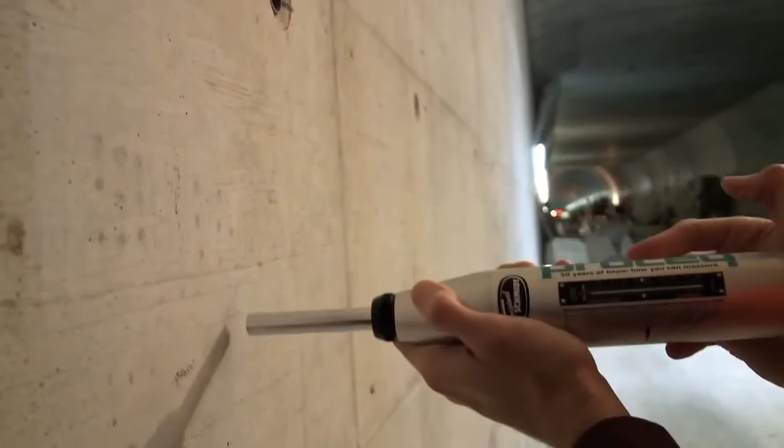The concrete test hammer, invented by Ernst Schmidt and introduced by Proceq at the beginning of the 1950s, remains to this day the most widely used non-destructive test instrument for a rapid assessment of the condition of a concrete structure. One of the most important parameters required by engineers is the compressive strength of the concrete.

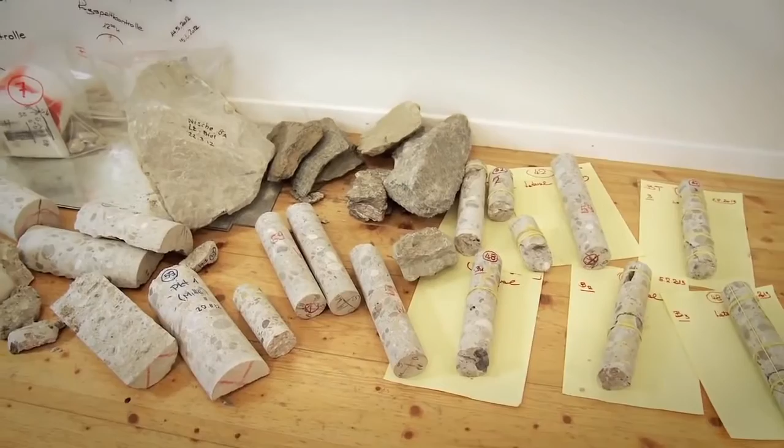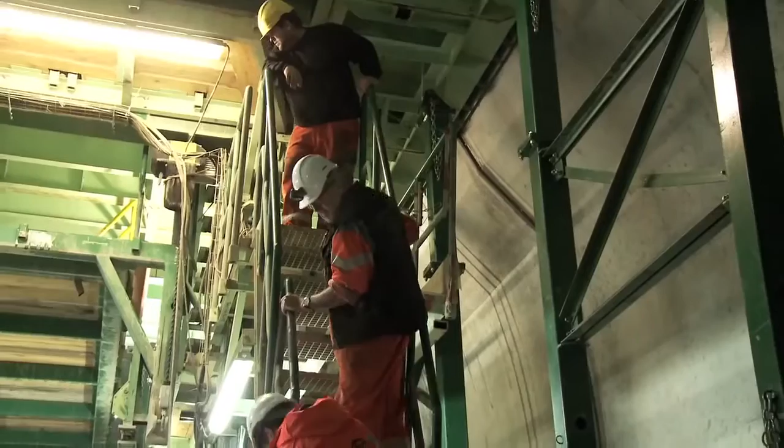The permission to take cores from existing structures is often severely restricted or even forbidden. In such situations, the rebound hammer is the only viable alternative to estimate the compressive strength of the concrete. There are many other application areas where access restrictions or the need for speed mean there is no practical alternative to the rebound hammer.

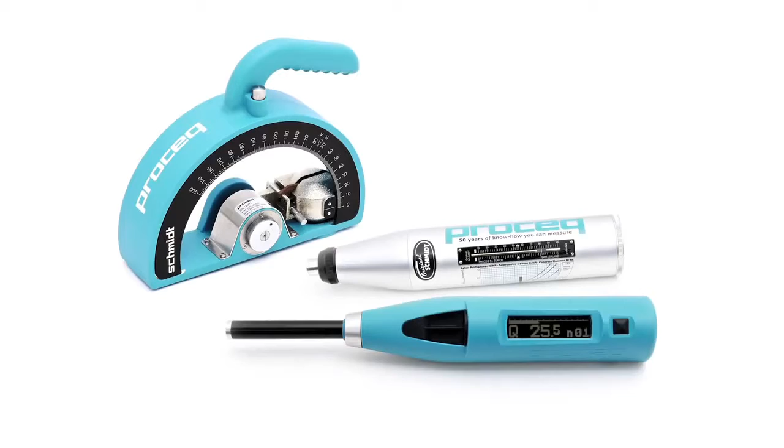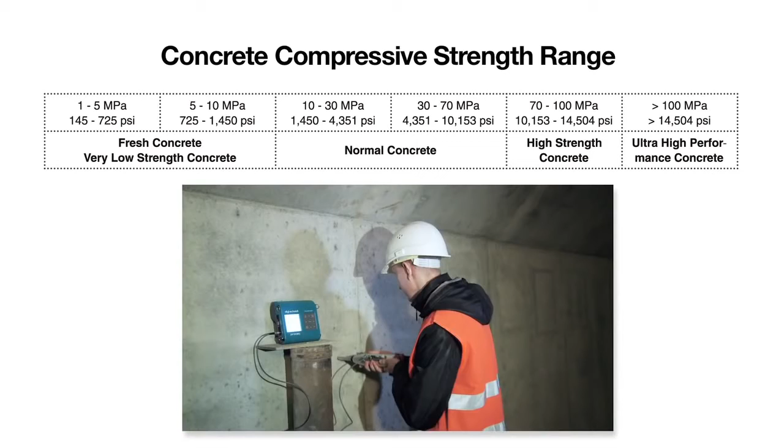Proceq's Schmidt family of concrete test hammers is the most comprehensive portfolio available. It covers the entire range of compressive strength classes from 1 megapascal, 145 psi, to over 100 megapascals, over 14,504 psi. Each rebound hammer is designed to meet the specific needs of the customer, with both standard impact energy and also low impact energy versions for thin structural elements and brittle objects.

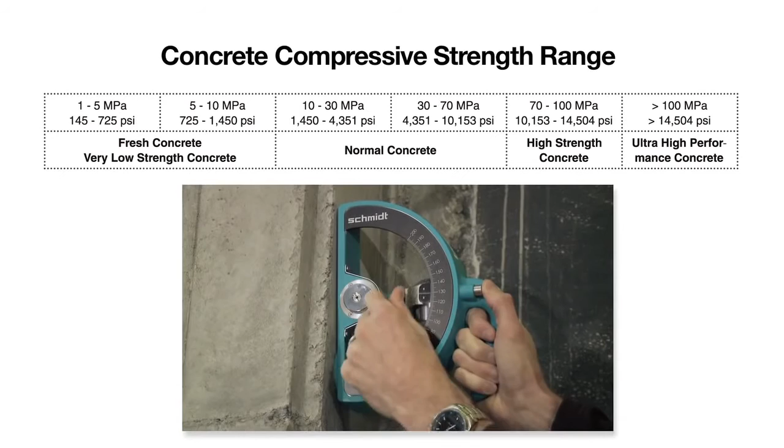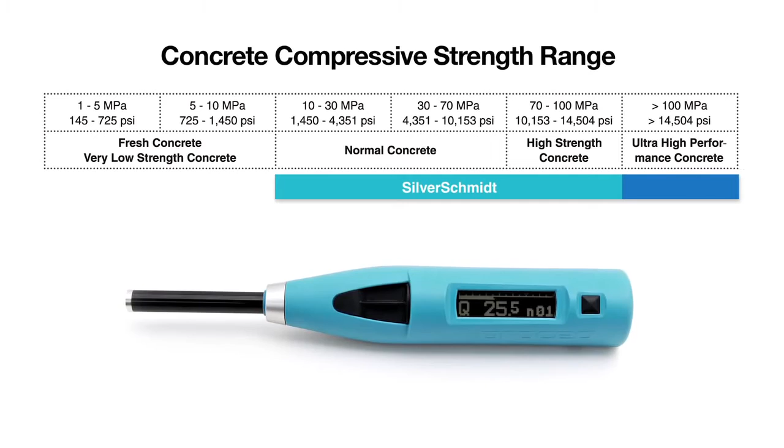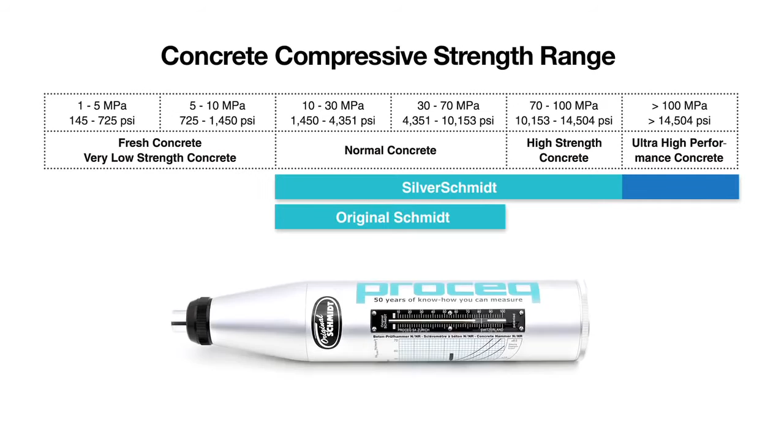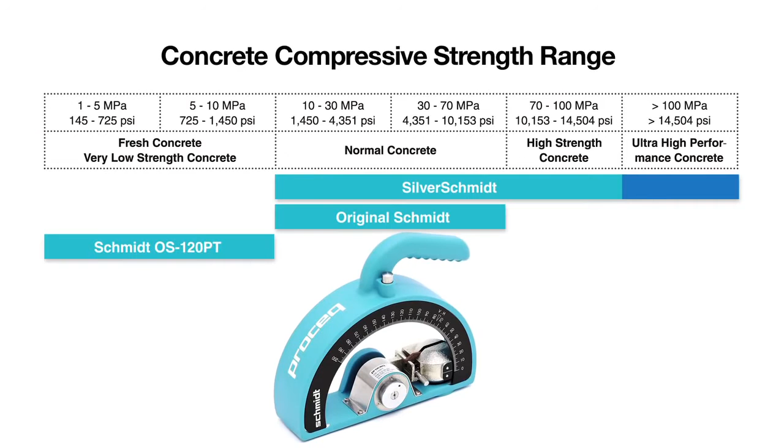With the fully integrated digital SilverSchmidt, Proceq offers the most advanced rebound hammer available in the market. The Original Schmidt is the basis of every international rebound hammer standard and remains the benchmark against which all rebound hammers are compared. The Schmidt OS 120 is especially designed to test on softer material such as lightweight concrete, gypsum boards, fresh concrete, and the mortar joints in brickwork.

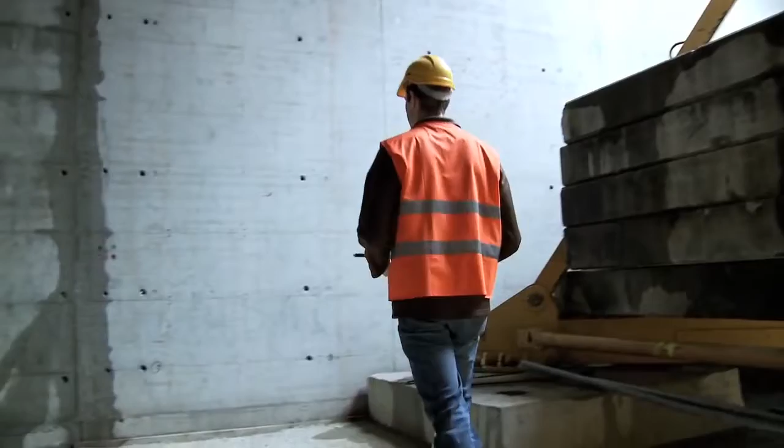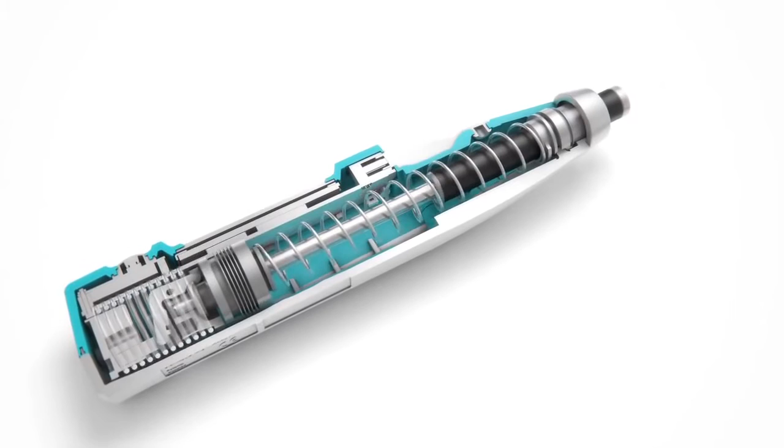The SilverSchmidt features superior performance, unmatched repeatability, and intuitive operation, all in a rugged and ergonomic unit. Independent validation testing has shown that the SilverSchmidt's patented optical detection technology for the rebound value Q has less dispersion than the classical hammers over the entire range. Another unique feature of the SilverSchmidt is the capability to test independently of the impact direction.

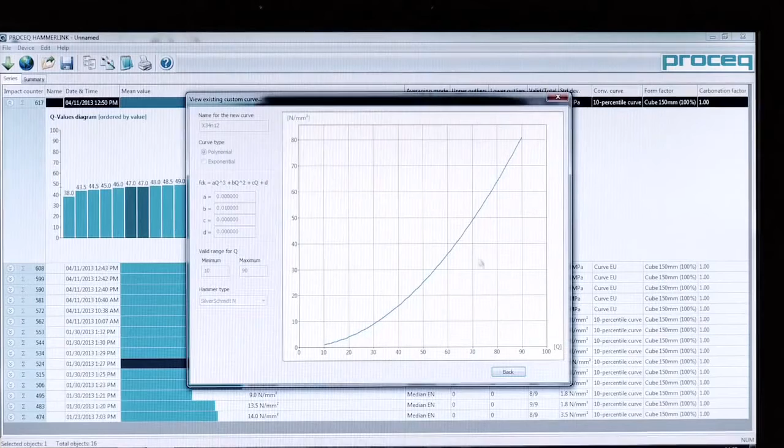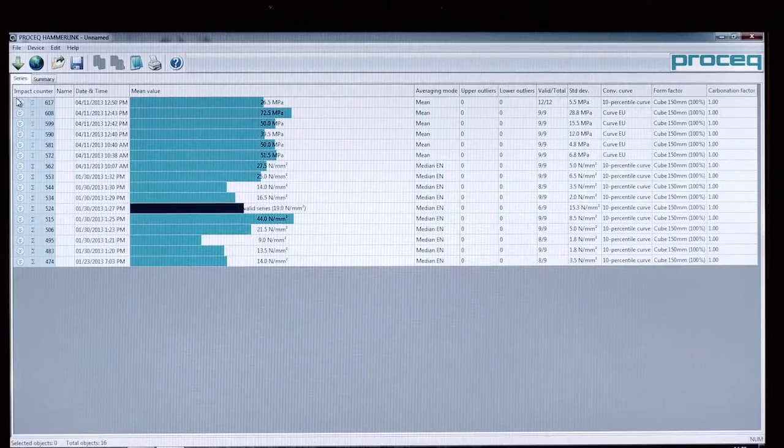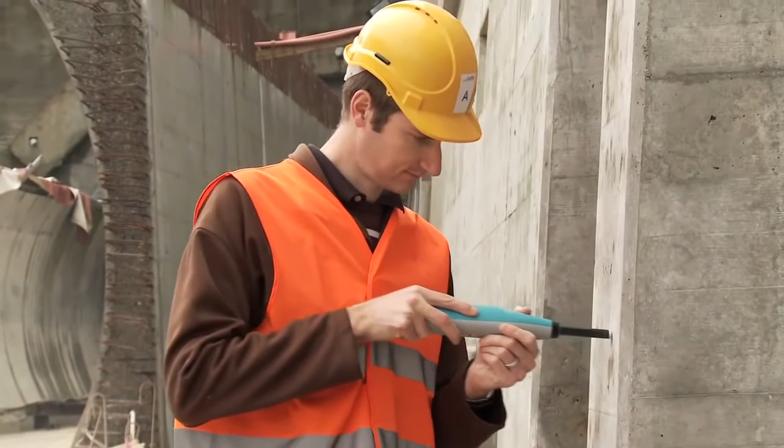User-defined correlation curves for customer-specific mixtures can be downloaded via the powerful Hammerlink software onto the hammer. This, together with onboard correction for form factor and carbonation, allows the best possible assessment of compressive strength. This method of working is recommended by all major standards such as EN 13791 and ASTM C805.

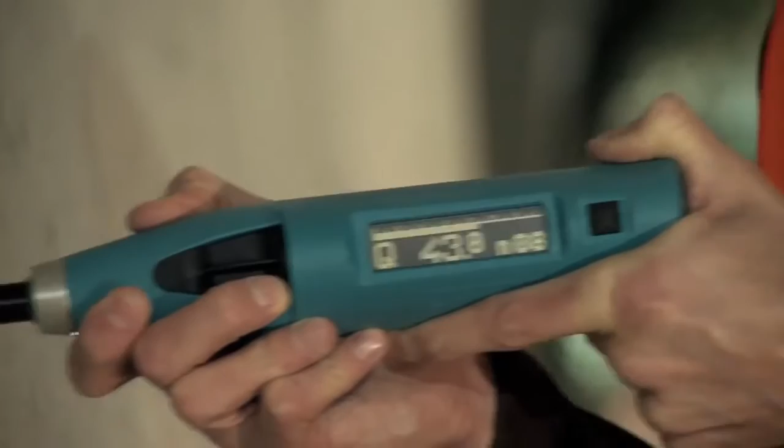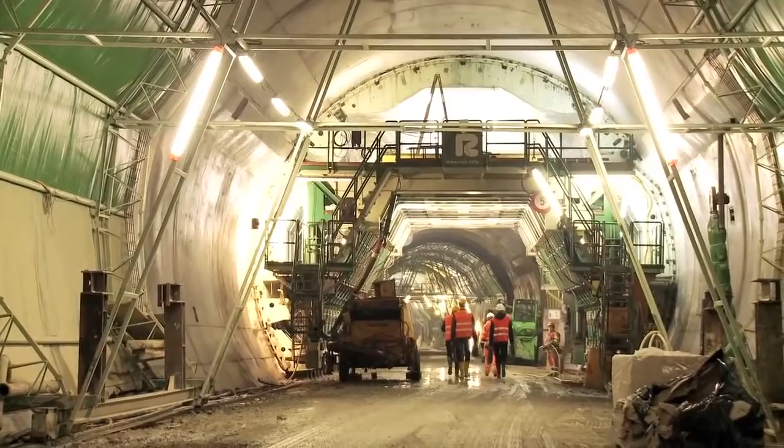In combination with the SilverSchmidt PC Type L hammer, the special mushroom plunger extends the lower measuring range down to approximately 5 megapascals, 725 psi. This, coupled with the SilverSchmidt's inherent angle independency, makes it the perfect tool to determine when the formwork in tunnel linings should be removed.

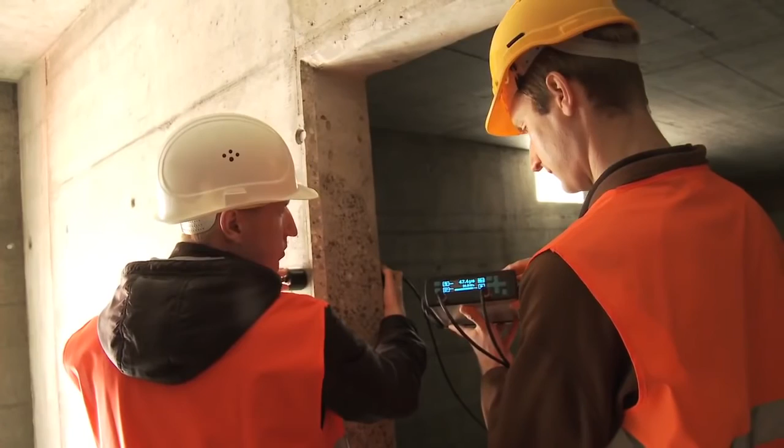It has been proven that rebound hammer measurements may be combined with ultrasonic measurements to give even better estimates of the in-situ compressive strength. Here we can see the SilverSchmidt being used together with Proceq's Pundit Lab Plus instrument to determine compressive strength on site using the SONREB method.

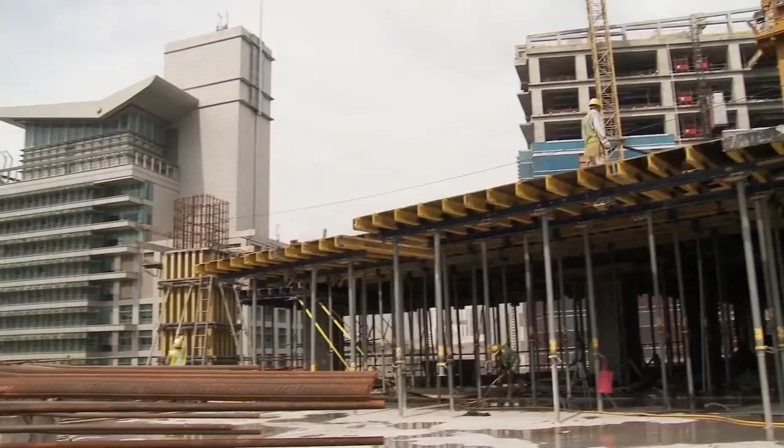Although they were developed primarily for testing concrete structures, the Proceq rebound hammers have long established themselves as recognized test instruments in other fields such as rock testing and paper roll hardness testing.